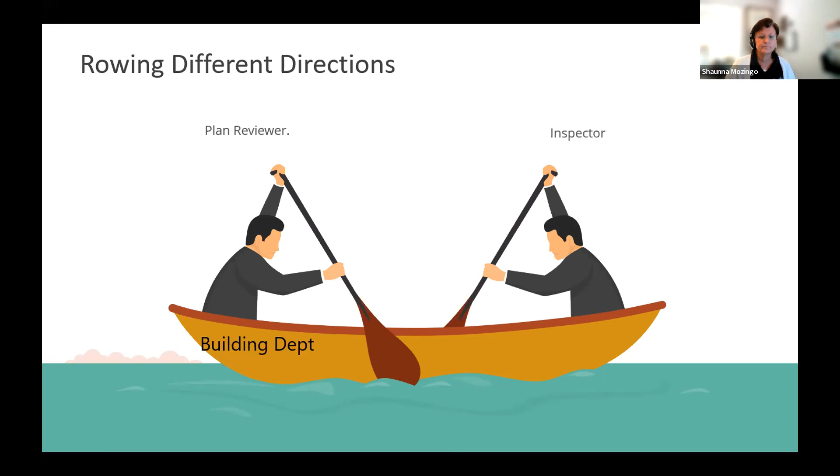So I would encourage you as we go through today, not only to think about your contractor and your designer, but to think about your inspector. What would help them on the set of plans? And how can you better that relationship so you're rowing in the same direction?

Another thing to think about is, what is the purpose of plan review? Well, sure, to make sure that the design meets all the applicable codes and that the building's safe and healthy and efficient.

But is there more to it than that? Or could there be more to it than that? Do you find yourself with designers that you absolutely love reviewing their plans because you can trust them, you know that they're competent and they're going to put all the stuff on the plans, you only are going to have one or two comments, and you probably can just identify those on the plans, stamp them and approve them and get them out the door.

But then you have those other guys, right? Their plans you have to really pick through with a fine-tooth comb because you have a history with them of trying to sneak things in or not doing their due diligence, not doing their work. I've had designers that after 10 to 20 comments, sorry, here's your plans back, start over. Sometimes they just want you to create their list because they don't really know the code, and they'll change just those items, right?

And so you have this history of different designers that you work with, and so it gets kind of frustrating. So we're going to see maybe later on how we could, by how we word our plan review comments, how we look at things, how we put things on the plans, take that knowledge transfer that we have and pass it on to the designers, pass it on to the contractors in the field if they open their plans.

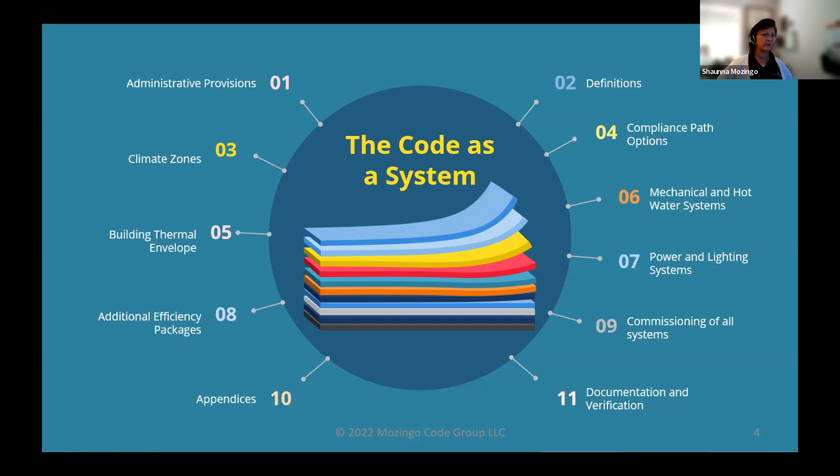Commissioning now in the 2021, commissioning doesn't just mean mechanical systems anymore, or just lighting controls. We have building envelope commissioning come into play. So commissioning takes on a new meaning. Then you have all your appendix chapters, and then of course documentation and verification. So it's a system, and we want to think of it that way. When we start doing our plan review and we start making comments on one, oh shoot, how did that affect this over here? I might have to make a comment over here. So just keep that in mind.

Another thing I want to just mention is in the energy code in chapter 1, it gives all these things. Okay, these are the things that have to be on the plan to be able to verify energy code compliance. And it gives you this nice little list, right? What compliance path, they have to tell you what path they chose now. Did they go prescriptive or performance or whatever? What R-values, solar heat gain, U-factor, everything about the mechanical design system, mechanical sizes, efficiencies, types. Residential, did they size it with Manual J? Commercial, did they do their equipment sizing?

That's something that, probably 1 out of 20 plans that I get for commercial buildings, they turn in their equipment sizing because nobody asked for it because they don't know how to review it. So it's probably one of my top 10 plan review comments. Please provide your load calculations, because they just don't do it on commercial very often. Nobody's asking for it. Equipment and system controls, do they have all of their sequence of operations, all their thermostats, all their controls, all of their demand control ventilation, lighting controls? Are all the controls listed on there?

Duct sealing, now it's required that on the plans they document their duct sealing and duct and pipe insulation and location. We're going to see when we get into some of the code requirements some new stuff. And so how do they do that? Do they just say, oh, we're going to seal our ducts? We're going to have all our ducts in conditioned space, so we're going to test them. How do they tell you on the plans what they're doing? A lot of times it's in a note or a comment, and it does require air sealing details. This is just residential, but I just want to give you an example of, it does require these air sealing details because we don't want them to get all the way to final where they fail a blower door. We want to give them a roadmap to 3 air changes per hour and help them succeed. And so they're supposed to put those details on the plans.

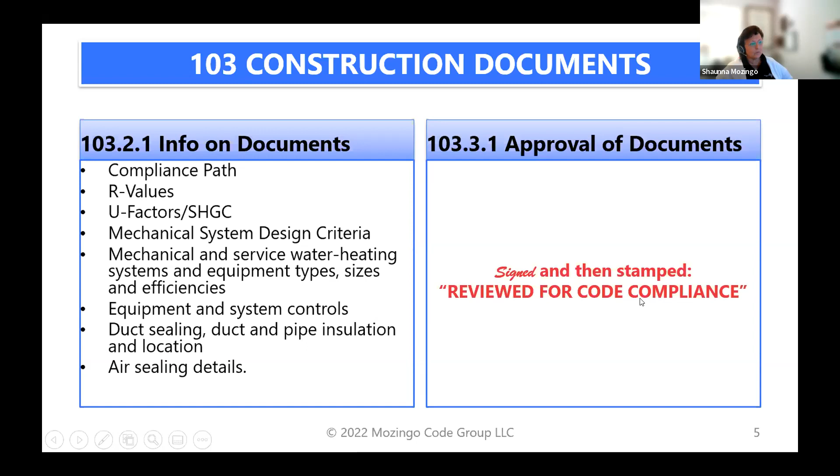But the other thing I want to point out is in chapter 1, if you don't amend chapter 1, section 103.3.1 tells you, once you've reviewed, you sign it and you send it out the door with a stamp. And the code is specific to say that the stamp says reviewed for code compliance. What does your stamp say? Approved, a date, a signature. If we're going to ask them to go by the letter of the code, maybe we better look at this section and make sure our stamp says what the code says, or amend the code to say what the stamp says. A lot of people don't pay attention to the things in chapter 1, so I want to bring that up.

Another thing to point out is in both residential and commercial, all the previous code editions had this section that said it's mandatory, meaning I can't trade it off no matter which path I choose, or it was prescriptive. They took that away. They said it was too confusing. So just want to remind you that just because the word went away doesn't mean that the requirement went away. When it said mandatory, it just meant these are all the things that apply to you that you can't trade off if you choose a performance path, right? So instead, they just took the word away. The requirement is still there. You have to do it. If you go performance, they just made it a table in that performance path saying, hey, here's the things you can't trade off.

Because that's when it applied anyway. So just to take the confusion away, they took it out of the main body of the code and just put it over. If you go into the performance, ERI path or performance paths, that's where you're going to find these tables. So none of that changed. It's all still required. It still can't be traded off. It's just listed in a different place. So remember that when you are going through and doing your plan review.

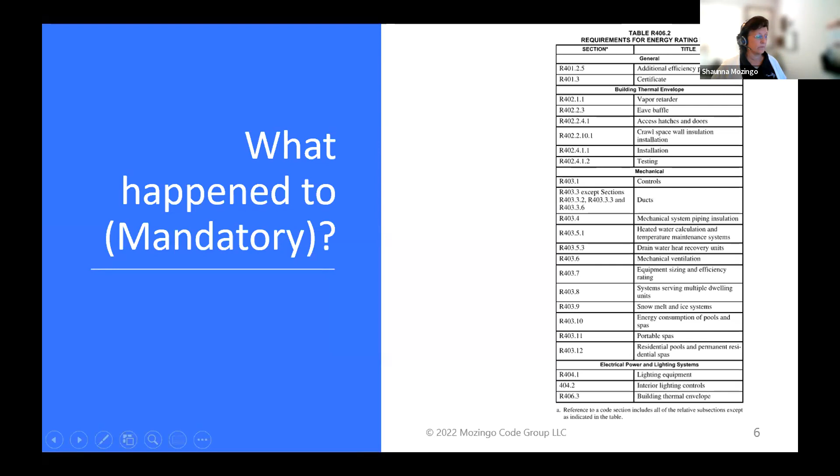Another thing, even though it doesn't necessarily say it in that list of things that you have to comply with, it is very important that you call out the thermal envelope. They have to depict the thermal envelope on their plan. What do they consider to be in conditioned space and not? A lot of times I see it like this, a section of a building. Okay, well, so their attic is outside the envelope. Then I know my insulation and air barrier need to be right here. If the attic was inside, then here I need to make sure I have my insulation and air barrier here.

You know, is the crawl space inside or outside? If I know what they're doing, I know where to look for things. And so it is now a requirement in the code that they depict that thermal envelope on there. I still get plans with it not on there, so I know people aren't calling it. But really, if we just get them in the habit of doing it, not just the habit of putting something on the plan. It's the education that goes with putting something on the plan.

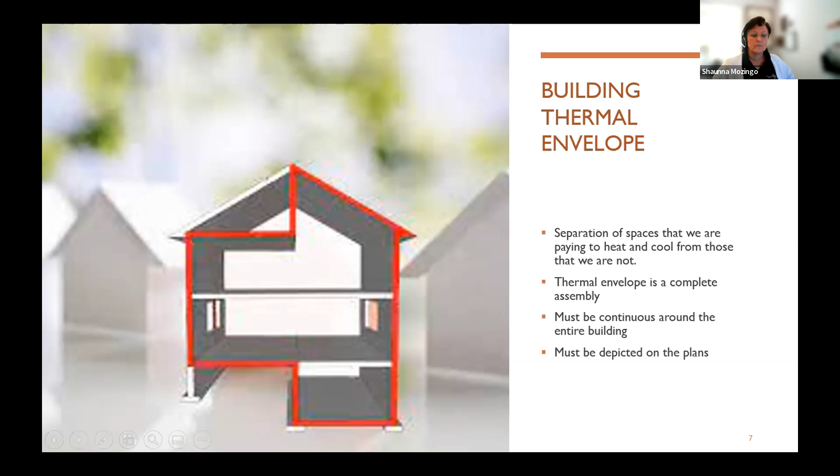If I make you depict your thermal envelope, I have just made you think about what is your thermal envelope. And so now I have a better chance of you putting the insulation and caulking the insulation and the air barriers in all the right places, because you had to put some thought into where is that. So there's reasons for it, right? We don't just put things in the code because we want them.

All right. Let's get into a few things that we should be aware of for residential plans. First, besides determining that the building's actually residential and knowing your climate zone. So hopefully you know the difference between a residential and commercial building for the energy code. Just highlighting that, residential is anything built out of the IRC plus those multifamily R2s, R3s, and R4s, so not always multifamily, but apartment buildings built out of the IBC, not commercial. They are residential for the energy code if they're 3 stories or less, so we just make sure we know that. I will tell you that some people are changing multifamily to all be commercial.

I tried to make that change this cycle in the energy code for ICC to just say, all multifamily will be looked at under the commercial code so that we didn't have this 3 stories or less, 4 stories or more. I wasn't even allowed to submit the proposal. ICC kicked it back to me saying, absolutely not, we're not doing that anymore. People have tried it in the past, we're not doing it anymore. We are sticking by the scope that is in the code, and you're not allowed to ask us to change that. So for those jurisdictions that have done it, you know, we had hoped that we could just do it nationally, but it's not allowed.

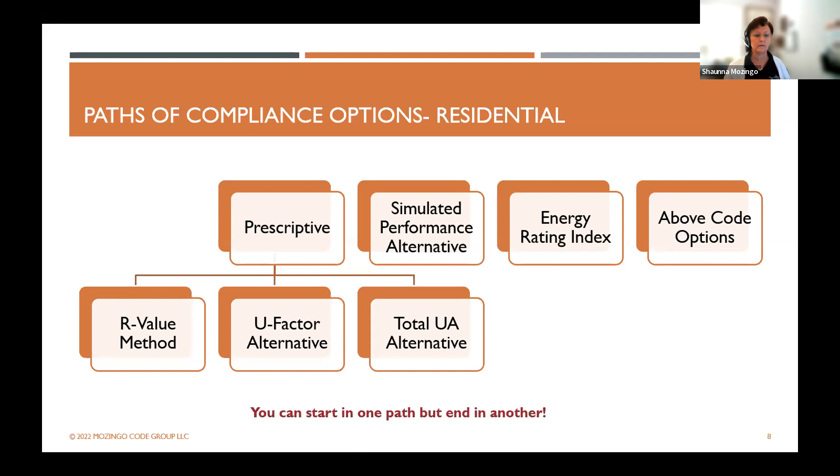If you get to performance and you can't make it work, then you're probably going to have to go back and change something under your construction. But at least go through all the paths to see if you can make it work. You know, it will have to get re-reviewed, but at least you're not tearing apart your building. So there are some things with that to think about. Same with commercial. All right, so some things just about the table real quick.

The table is changed, and so make sure on residential that you're looking at the different things and that you're downloading your errata. Go to iccsafe.org Errata Central. If you just do a Google search for Errata Central, it'll pop up. So Errata Central, download the errata. There's a lot, especially for that 2021.

The things that we're going to talk about today will apply to any code edition, but we're going to specifically talk about 2021 as I go through these slides, because you'll see, here's your prescriptive table. If I go prescriptive, I have to do these things. Yes, there are some changes in there. We're not going to talk about all of those changes; that was in a different class. We're going to talk about how to find them on the plans and what we need to know.

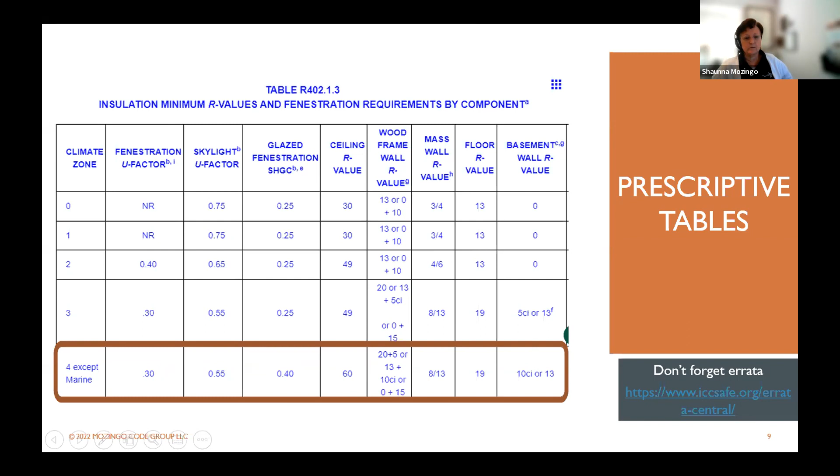The biggest thing that I feel you need to know is there are some errata, especially for commercial buildings. How did I end up with that table right there? And for the R-values. So if you look at this, here's our climate zone. Say we're in Denver and we're in climate zone 5. Here's the table right here. This is the new 2021 table. There's a lot of errata.

So make sure that you're downloading it, because they really had the intent of offering, if you're a 2x6 wall, an R20 plus 5 prescriptively. If you're a 2x4, you still have the opportunity to use 13 plus 10. But they also wanted a cavity-only option. So if you just want to do cavity and not cavity plus continuous, you could do an R30. Might have to change some of your framing, but you have that option. Or if you wanted to do continuous only, you have that option.

Sometimes in the first printing of the book, that didn't show up. So make sure that you're downloading the errata to get really what you should be doing in those jurisdictions. Look at your footnotes, read those footnotes, because those footnotes have some new things. If I'm a plan reviewer and I go back to this table and it tells me that I need a 0.30 window, did you read the footnote?

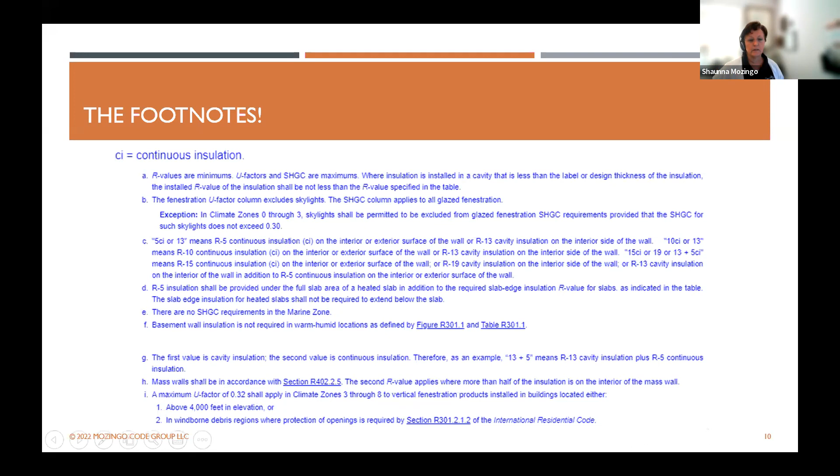Because over here in the footnote, it says it could be 0.32 in climate zones 3 through 8 if you're above 4,000 feet in elevation. Name a place in Colorado. Maybe there's two that aren't above 4,000 feet. So now really they're allowed to get 0.32. It's because of the way the window's made, especially if they have that argon gas; once you get over elevation, that gas isn't as good, and so the U-factor changes over certain elevations. So just some things that I'm noticing people are not looking at when they're reviewing their plans.

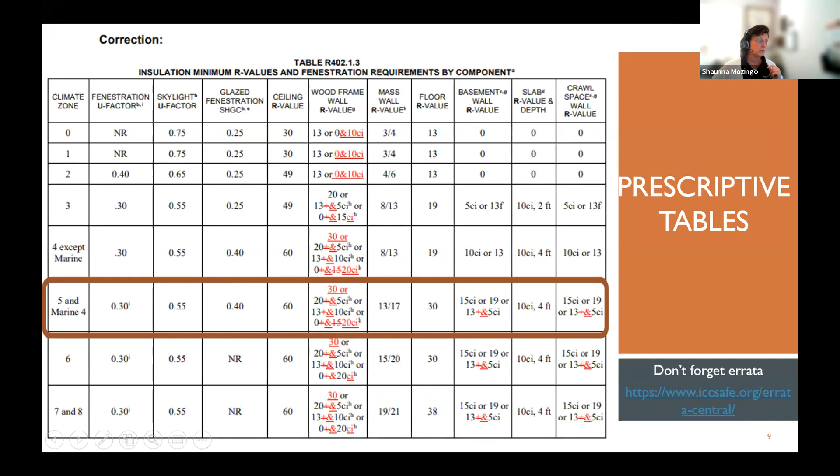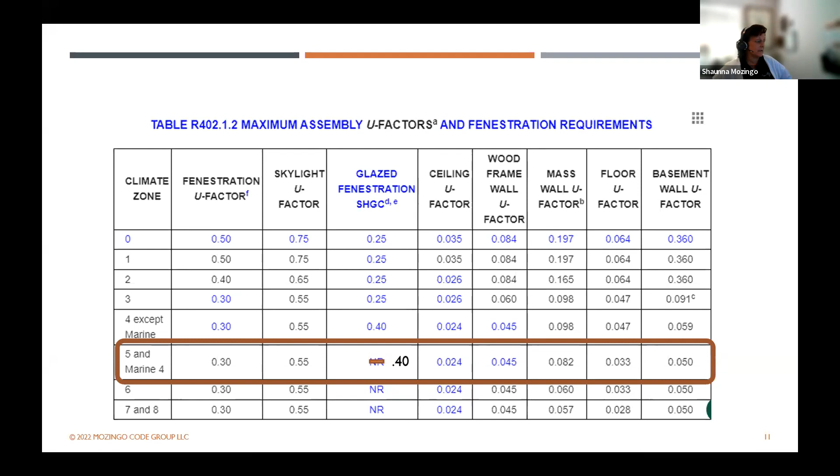That makes a big difference in equipment sizing: how much heat makes it through the window or doesn't. You know, if I have a lot of heat coming through the window in the summertime, I need maybe more air conditioning power to offset that heat. So it does make a difference in equipment sizing.

So pay attention to that. When you're using the total UA, that's your REScheck path. That's a total UA. This is like saying I have two buildings side by side. I'm gonna look at them side by side. One is if I did it right out of that table, but this is what I want to do.

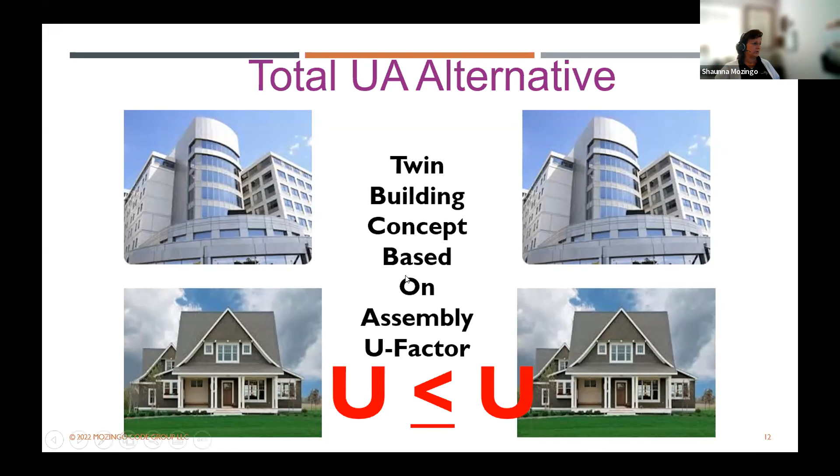And it's just comparing anything that can be converted to a U-factor. So your framing materials, your insulations, your windows, those kinds of things, anything that can be converted to a U-factor, it's comparing them side by side, and you can make trades. Instead of R-60 in my attic, I can put the R-49, as long as somewhere else I do better in a U-factor, so that I can equal out.

Most commonly people use REScheck to do it. You could turn in your manual calculations. I don't see anybody do it because this is a free software. So a couple things to note that I see people missing on the plans when they're doing REScheck. First of all, REScheck is supposed to be a mirror of the plan. If the plans say they're doing cavity-only insulation, the REScheck shouldn't show a cavity plus a continuous, right?

A lot of times they'll say, oh, well, there's an R-2 value in the framing or the air film in the drywall. No, REScheck already knows there's going to be framing, and it assumes drywall. It assumes best practices for that wall. It knows there's R-value or U-factor in that, and it is calculating that behind the scenes. The only thing you get to do is put the actual R-value of insulation.

Now, if you're doing like an insulated siding, or some kind of insulation on the outside or the inside of the building, you can put that there. But most of the time when I see R-2, I'm like, wait a minute. What insulation are you using continuously to get an R-2? And it's usually them telling me they're counting the drywall. The system already does that. So that's one thing that I see.

I see a lot of times people put the wrong climate zone, which affects what is required. So if I put in climate zone 2, I don't need as much insulation, and that's what it's going to compare me to. So I want to make sure that I put the right climate zone in there, and that I put new construction and not alteration. That makes more of a difference on commercial than it does residential. But just making sure that the inputs are correct here, and that it passes, that you got the green line.

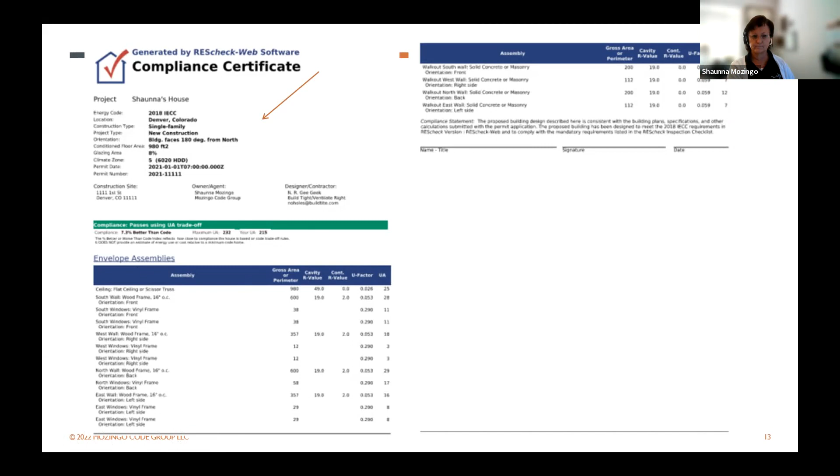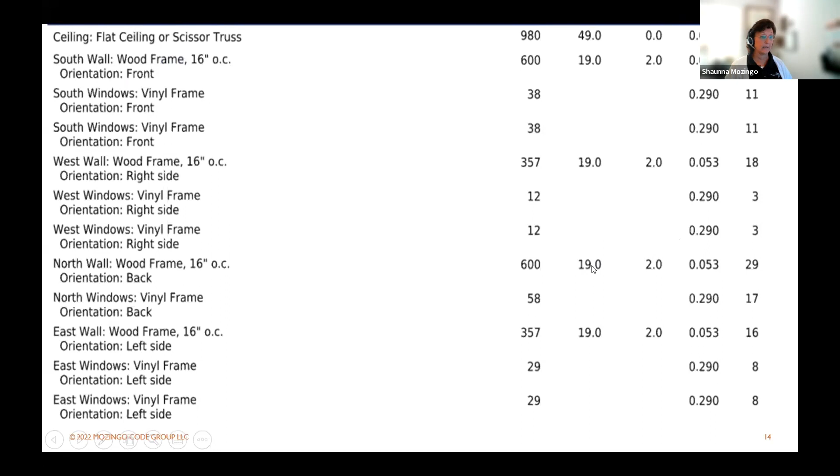This is just a tool. This isn't a technical, scientific document. This is a tool to say, the plan said all of this. Yes, it passes. No, it doesn't. So it's supposed to be a mirror image of that. Really going through, is this the U-factor they said on the plans? Is this the R-49? Are they showing R-19 cavity plus continuous? Just really going through there and noting that.

Performance gets a little more complicated sometimes. It's really that same twin house concept. It's just not only U-factor. It's looking at the whole building. How does energy move? How does air move in the building? How does air move in your ducts? It just looks at all kinds of different things in there.

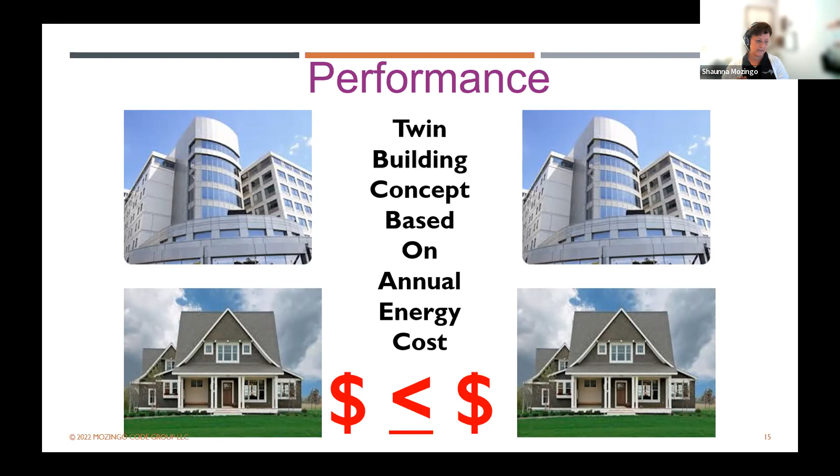And instead of complying based on U-factor, it's complying based on cost. If I built this house, it's going to cost me $100 a year for energy, but the way I want to build it has to equal the same or less in energy cost per year. So you're looking at a report, usually done by an energy rater because it requires certified users for the software.

There's a lot of software. The two most common, Ekotrope and REM/Rate. EnergyGauge is used in Florida. Wrightsoft is coming out. I hardly see it used, mostly for equipment sizing, but why not come out with an envelope compliance software, because you are having to enter everything about the envelope to figure out what size equipment you need. So they came out with that. Reading the reports, the things that I see the most.

When you're reading these reports, again, a mirrored image of the plans, whatever they say they're putting in the building, that's what you should see. 2x6s, 16 inches on center or 24 inches on center really makes a difference in U factor. Less wood, better U factor, right? So if they're doing 24 inches on center or 16, or if they're doing 16 but calling it 24 on one of these documents to get a better credit, things to know, right?

What insulations, what windows, but this also has a cost shown on it. This is an older report, but the idea is the same. It tells you if I built this house to code, here's how much it would cost. Here's how I designed it. This cost needs to be less than this cost, equal to or less. I have seen them come in with a much higher cost. And down here, it'll say it does not meet.

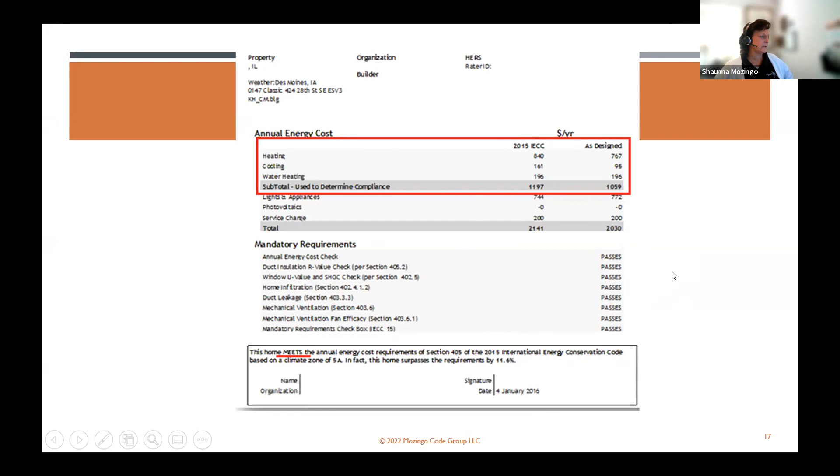So are you reading it, right? The cost is less and it says that it meets the code, and it meets the code for the edition that you're on, not an older edition, right? So those are the main things that I see plan reviewers messing up. It will also tell you the mandatory requirements that are in the code and whether they've looked at them. It's really a check button that they click in the software, so I usually still look at the plans to make sure I see all of those things on the plans. So some things to look at on a plan review report.

Now, the software will also do a REScheck or a UA calculation. So you can see that it passed. This is the same house. It passed for cost. But when we look at their overall UA, it has a higher UA than if they built it to code. So it totally does not pass UA. That's good to know. Some houses will pass both ways, but it's good to know that, all right, they didn't pass UA, they only passed performance.

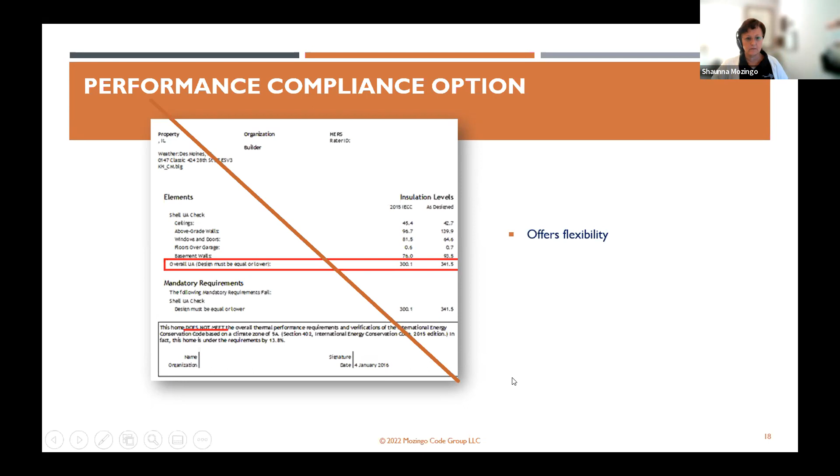So if anything changes in the field, I really need to be paying attention to this because there's not another path that passed, right? If they pass performance and they don't do everything towards performance, then we need to pay more attention. If it passed UA and they didn't do everything, I still have the performance path to go to. So these are some things to keep in mind. All right, I better get moving here.

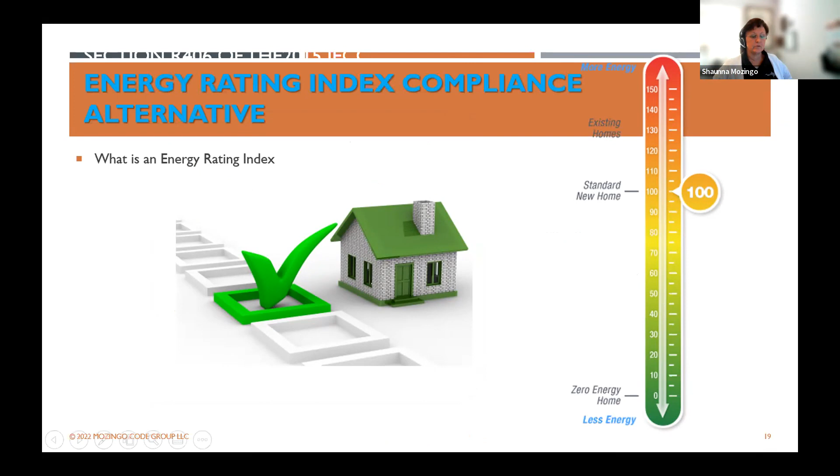ERI path, that is your energy rating index path, that's using a score. So some things to keep in mind, those reports, it's the same people, it's the same things that I see. You're allowed to trade off more. So there are some things, if you put solar on, there are limits to what you can trade. So you really want to pay attention to that. You're not allowed to just trade whatever you want and throw solar on to lower that score. There are some backstops in there.

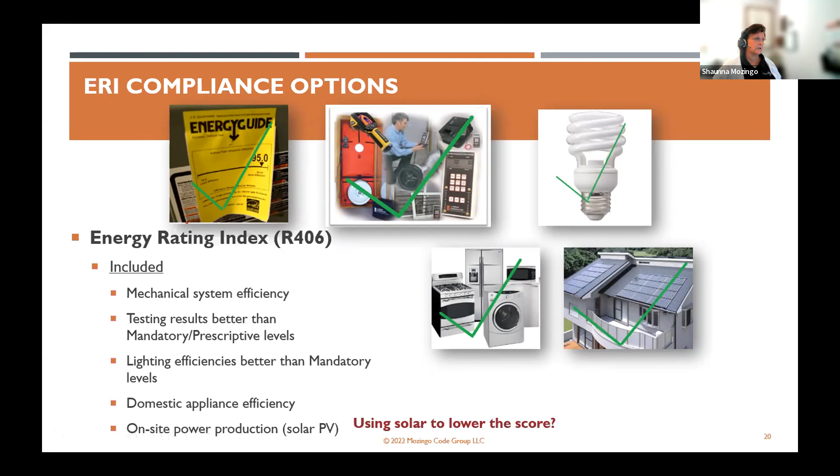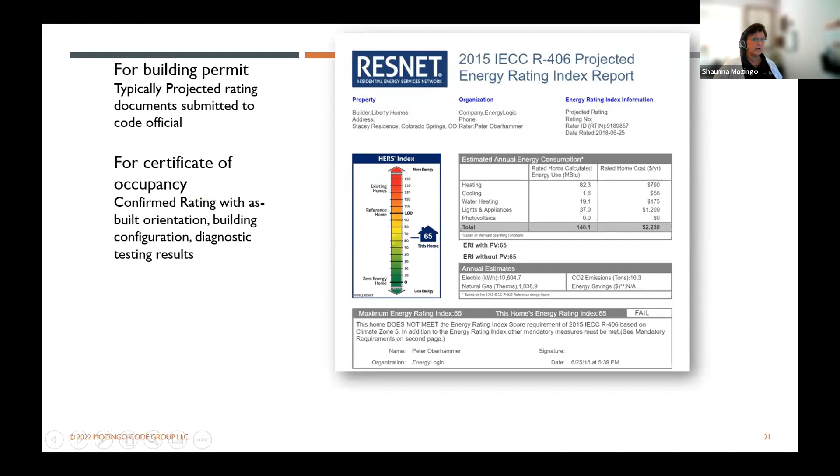When I see the reports, I'm really looking to see, did it meet? No, does not meet. Why doesn't it meet? Oh, it's got a score. It says it failed. It has a score of 65. Oh, what is the score that's required? Oh, well, if I'm in climate zone 5, it needs a 55 to pass. Sorry, go back, right? I can tell you, I see a lot of plans coming in that have failing documents because nobody's reviewing them, they're just accepting them.

So I'm just trying to give you a couple little things to look at. Even if you don't do a full-fledged go through it, make sure everything lines up, at least look to see if it passed or failed, right?

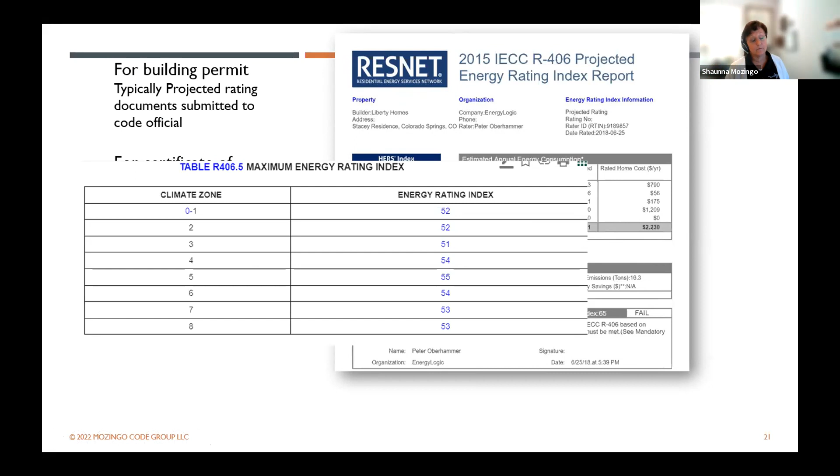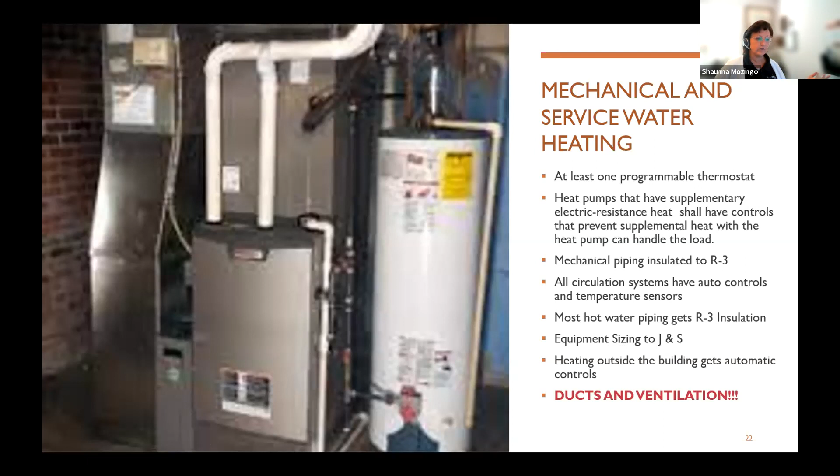Mechanical, there's some things in mechanical. Do they have their thermostat? Did they insulate their piping? A lot of that didn't change residentially. Did they size it? Do they have their controls outside so the boiler's not running all the time if it's warm enough outside to melt the snow, if they have a snow melt system? But there are some new requirements for ducts. And so I want to run you through that real quick. And how do you call that out on the plan?

It's revised to really clearly define ducts inside the envelope versus outside conditioned space, tells them how to insulate the ducts outside the envelope, or even ducts buried beneath the building or underground. All of that got defined in here, and when you can use TDE, thermal distribution efficiency, as an equivalent to an R value.

So all of that is a little bit more defined in there, but there's also a change to ducts within the thermal envelope. It's really specific now about how to deal with ductwork in a floor or a wall, an exterior wall, and when they are considered in the envelope or not. So really just pay attention to that duct system and to those code sections on the duct system.

But what I really want to point out is the biggest of these changes is the requirement that is added by actually removing an exception to now mandate that all ducts get tested, whether they're in the envelope or outside the envelope, right? It used to give you this whole duct system requirements for testing, and then it said, except ducts within the envelope. That exception went away, right?

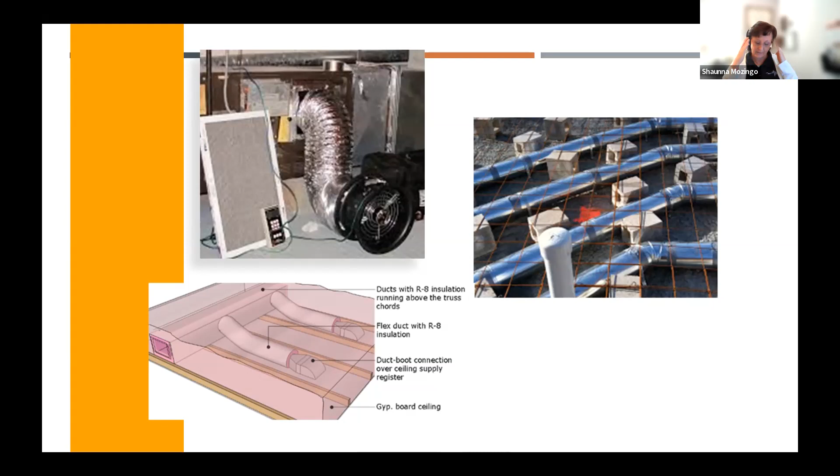It's how do you read the code book? We're going to go over this in a couple of sections. How do you read it? The exception is removed, so now all ducts get tested. All it says, though, is that if it's within the envelope, you can have a higher leakage rate than if it's outside the envelope. And if you go performance, you could trade off the leakage rate. But if it's prescriptive, you do this.

So there are things about how you read the code. That's why I'm saying this code is a system. How you look at what path they chose or where the ducts are, how things are in the envelope affects mechanical. So really keep that whole system mindset going when you're going through this code.

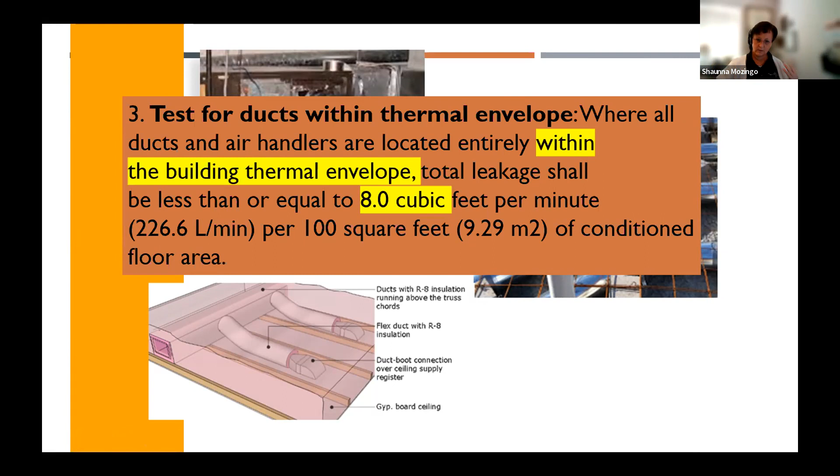So making sure that, okay, the ducts are in the envelope and you chose performance. All right, your ducts can leak this much, but you can trade it off. Oh, you went prescriptive or REScheck. Okay, your ducts are in the envelope, they can leak this. The ducts outside the envelope can only leak this, and you can't trade it off, right? And so there's just knowing how to use the code and knowing how to read it.

Lighting has changed a little. Lighting is something we don't spend a lot of time putting on the plans. Like, oh, you got 100% high efficacy lights. All right, great. Maybe they never even mention what kind of light bulbs they put in on a residential plan. So you make a plan review comment, required to have 100% high efficacy lights, right? It used to be 90, it was 75, it was 50. It just keeps going up, 100%.

Now, there are some new requirements in there, though. New lighting controls are brought in that require either dimmers or occupancy sensors or other controls built into the fixture to be installed. It does provide some exceptions for bathrooms and hallways and that sort of thing. So make sure that not only did they put in the right light bulbs, do they have the right light switches, right? It's not enough to have a high efficient light bulb. You have to turn it off when you're not using it.

And so how do you write that on the plan? Do you turn down the plans because they don't have the right lighting controls? Can you make it as a comment? If you make it as a comment, is there a way to word it that they're going to remember it and put it on future ones? Sometimes I will reject a set of plans and tell them, hey, you have these requirements, even though I probably could have, depends. It goes back to, what kind of designer am I dealing with?

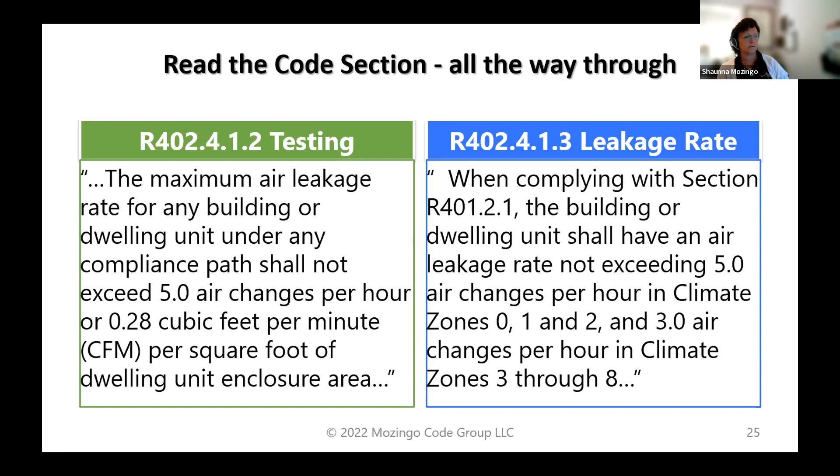So what happens when they're writing these codes, a bunch of different code proposals get combined to make it in the code. ICC does their best to put them in an order, but they put that performance requirement first, and people read that and say, oh, it's 5 air changes per hour. They never continue on to see that this other section is in there. So be aware of that.

There are some additional efficiency package options that got into 2021. We need to make sure those are on the plans, because in order to make that 10% jump they said we made, it included picking one of these options. In 401, it tells you to pick a path. In the path, it tells you when you have to comply with 408, if you're prescriptive or performance, unless you do some other things. So then you figure out which option they chose.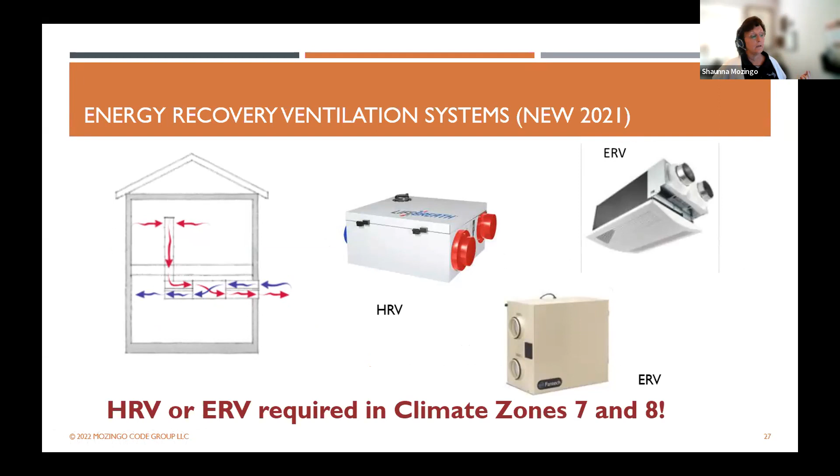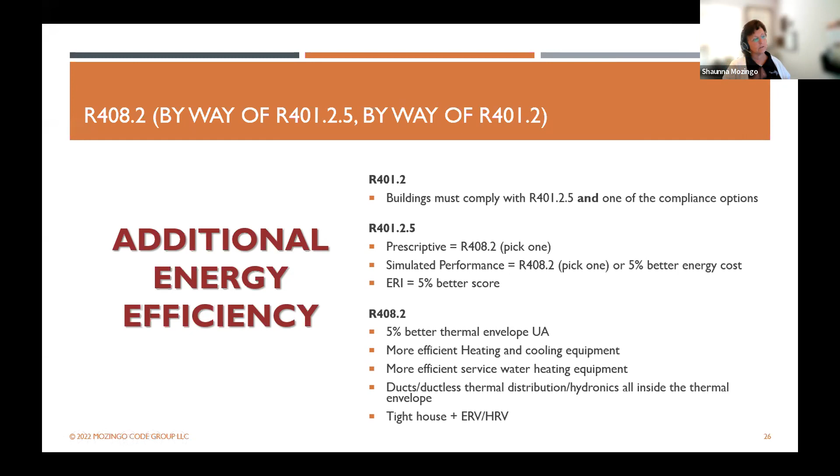The one thing I want to show you is in climate zones 7 and 8, there's a new requirement in 2021 that they have to put in an HRV or an ERV for their ventilation. If they're required to already have a tight house and an ERV or HRV, maybe they shouldn't get credit for that as an additional option. That's not an additional option; they were required to do it. So there are some things you really need to be aware of as you're going through this code.

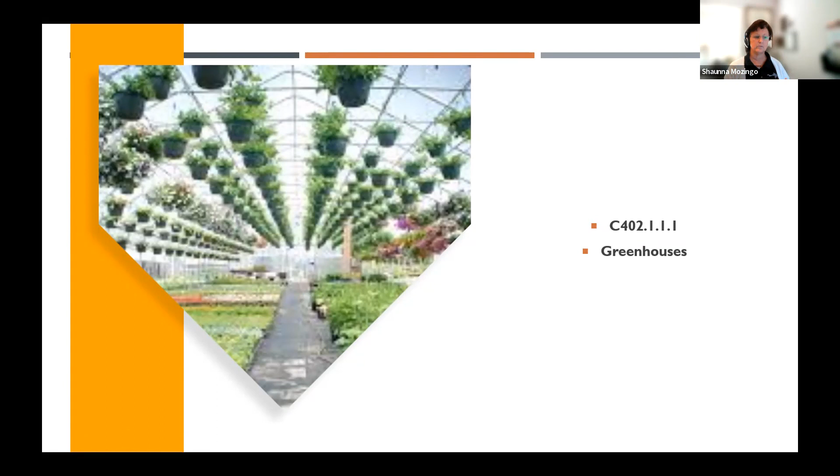I'm going to zoom through. We talked about greenhouses. As we're in commercial now, greenhouses are defined, but they also redid it. I just want to plant in your head: we used to say greenhouses are exempt, grow facilities are exempt. They're not anymore. They're not exempt from envelope, and they're not exempt from lighting. So pay attention to that section. They've got a whole section on conditioned and unconditioned greenhouses; it's a little confusing, but they're trying to separate low energy uses from higher energy uses.

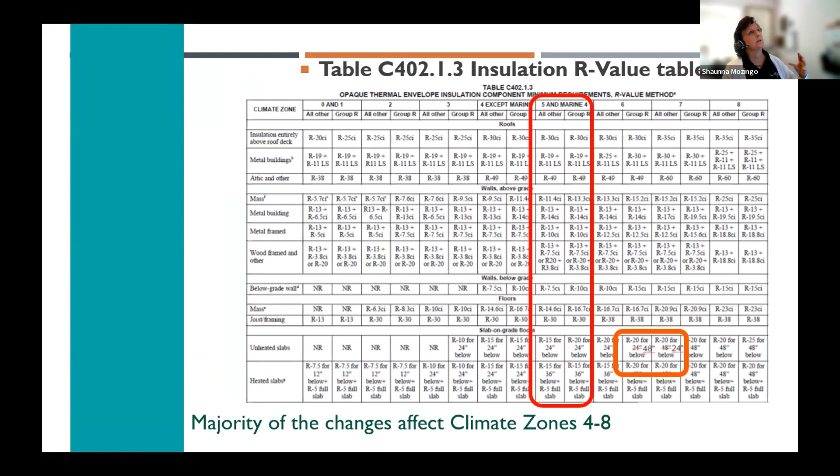The table changed. This pink shows all the places the table changed for commercial buildings. Make sure you're in the right category, but pay attention to your errata, because your designer might not download the errata. They might turn in slab insulation of R-20 for 24 inches thinking they're following the code, without the errata that says in those climate zones it has to be 48 inches. And so you have to reject the plan. Make sure you have the most up-to-date version so you're putting in the right thing.

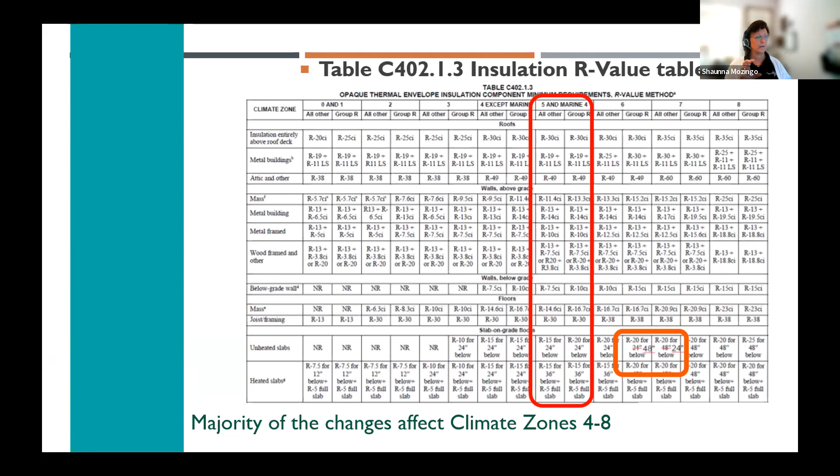COMcheck is still allowed, for the envelope, and it has mechanical and lighting as well. The biggest thing I find on COMcheck is people not checking for the word "other." If you see the word "other" in any of those descriptions on the report, that means they chose something that wasn't normally in COMcheck and had to manually enter the value, whether it was an equipment efficiency value, a lighting value, or an envelope R-value or U-factor.

They manually put it in there because it wasn't in the drop-down list. So whenever they choose other, it pops up and they get this notification that says, hey, you're going to have to turn in documentation to verify what you just entered. So they know they have to, but they know also who's requiring it and who's not. So whenever you see the word other, just know that means they manually put something in there, and you should

double check it. Some other things, projections: a lot of times they're putting in projections when they don't really have one. And if they have a projection, it allows them to get away with a higher U-factor or a higher SHGC, a worse SHGC on their windows, the bigger the projection. So I check for that, make sure that they're not putting projections if they don't have one. But this is nice just to show you the help menu on COMcheck. It really walks you through how to measure things, what to look for, how they looked at it for compliance. So be familiar with that in there.

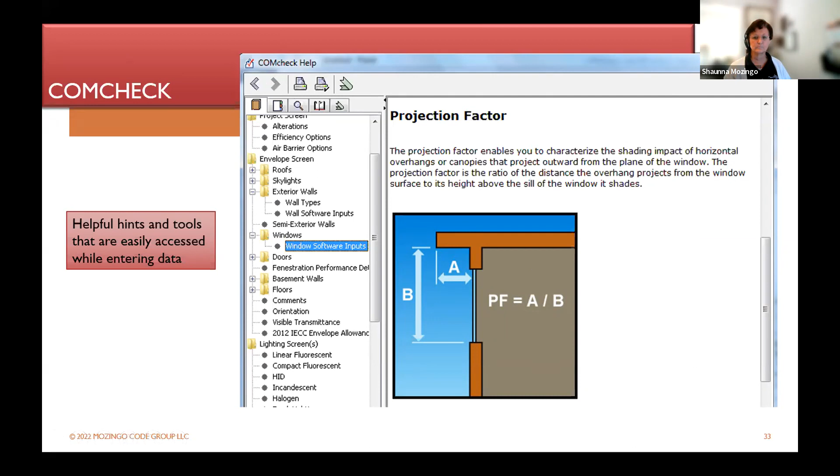Performance, commercial performance, the reports are different. People get confused. They make them more complicated than they have to be. So I really just want to say, when you're looking at a performance, if somebody goes performance on commercial, don't be freaked out, right? It's like taking a test. When I take a test, I know the code by heart. When I go to take the test, I might get a 70 or a 75 because I freak out when I'm taking a test, right? The same is with these reports. Oh my gosh, it looks so confusing. Where do I start? Start as if you were reviewing a set of plans, if you were reviewing a COMcheck or a REScheck.

Do the things they say in all of these 50 pages match what they're doing on the plan? Are the ducts where they say they are? Are the sizes of the rooms the way they say they are? Are they in the right climate zone? If they say they have 50 pieces of equipment, do they have 50 pieces of equipment, right? If they're saying they're using 2x4s or 2x6s or metal construction, is that what the plans say? Just make sure you're comparing apples to apples and that it's the same cost. Is it going to use less energy at the end of the time than it did before, right? So just don't freak out about it.

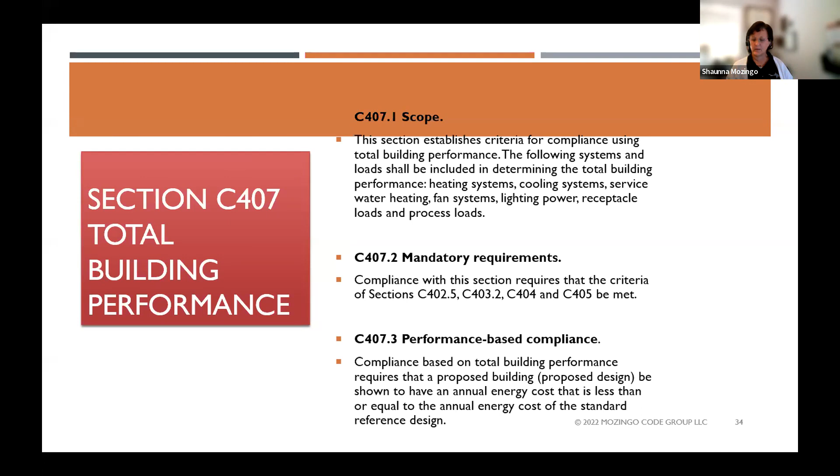If you get these and you don't know how to review it, email me. We'll review it together. Or put in a question into the toolkit, not technical assistance, but the code question part, where you can type in a code question. Can somebody help me go through this? One of us will respond to you and we'll go through that with you, right? So don't freak out about it. Just compare it. Are they comparing apples to apples?

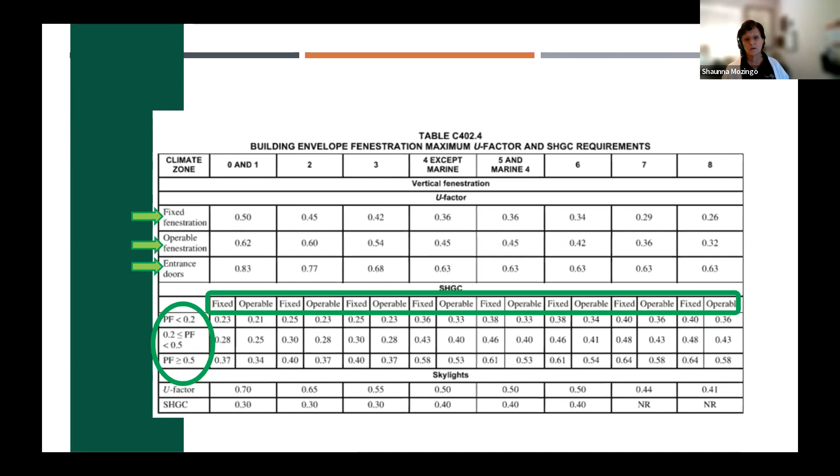Make sure that if they're calling out a projection, PF, projection factor, that they get a different SHGC for the projection. So you could see, like in climate zone 5, I can go from a 0.33 all the way up to a 0.53. That's huge. That's going to really affect their mechanical equipment sizing if you let them have a 0.53 and they didn't have a projection. So really, really look at that. Make sure you're in the right climate zone and looking at everything for that climate

zone. And then a couple things to really point out that have changed for commercial buildings that you're going to need to pay attention to as a plan reviewer. You think of this as an inspection issue. Somebody's got to verify blower doors on commercial buildings and air barriers on commercial buildings. It starts with you. It starts with a designer. They might not get it right, but it starts with you.

Make sure that it's identified on the plan so you don't get to some other phase of construction only for them to fail, right? We want to build that roadmap to passing. So there's requirements for continuous air barriers. That's always been in there.

But now, you have to test if you're a dwelling unit, a commercial dwelling unit, maybe it's a hotel. There's certain things, if you're dwelling units that are dwelling and sleeping units, that you have to test the building. And then even for those buildings that don't have dwelling units or sleeping units, depending on the size of the building and the climate zone, there are blower door test requirements. So we want to know that, right? We want to know if they're required to test.

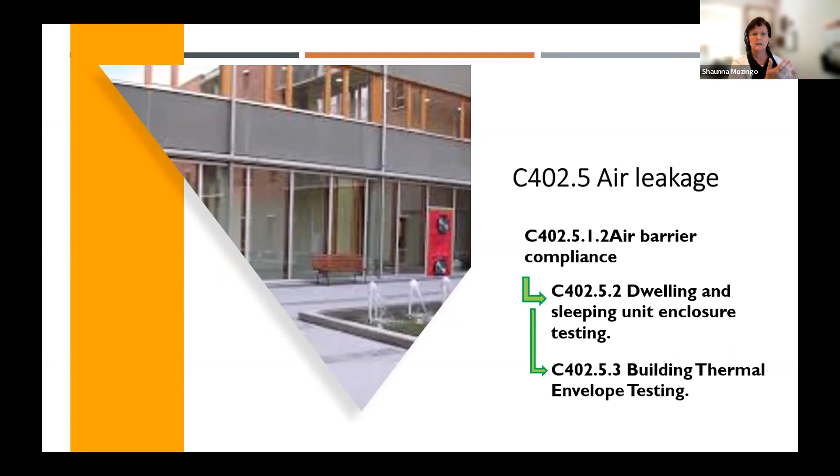Maybe the first couple times we're going to turn down a set of plans and say, hey, identify how you're going to have to test this building. Where are those details for that tight envelope, right? And then there's also this requirement that the air barrier has to be commissioned now. Somebody has to verify as they're putting up that air barrier that it is continuous and it's installed correctly. It could be the code official, it could be the designer, it could be a third party, but somebody has to verify that air barrier commissioning, right, of the thermal envelope.

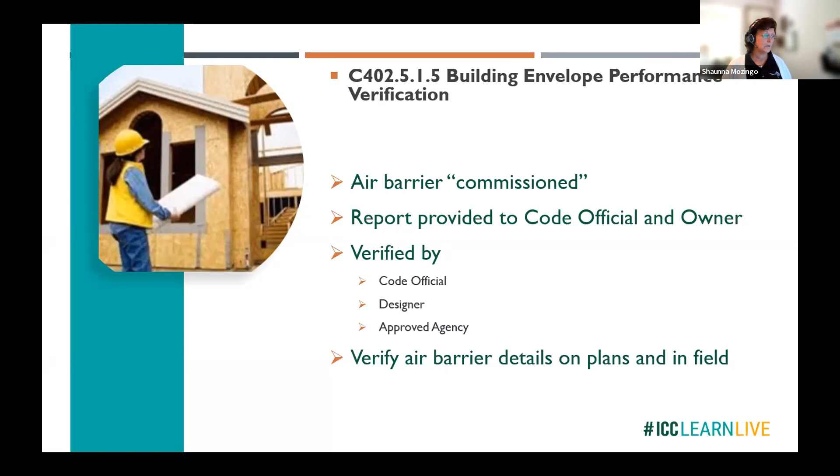Those are new requirements that they're not used to. We're going to need to be their first line of defense on this. We need to be identifying that on the plan. Maybe it's turning it down a time or two until they start identifying it on the plan. Sometimes if they don't know the requirement is there, you get out in the field, they're not opening those plans. Is it their fault? Yes. Are we wanting to get to the end and have them fail? No. Is there things we can do? Yeah, we could fail it at plan review once or twice, just some things to think about.

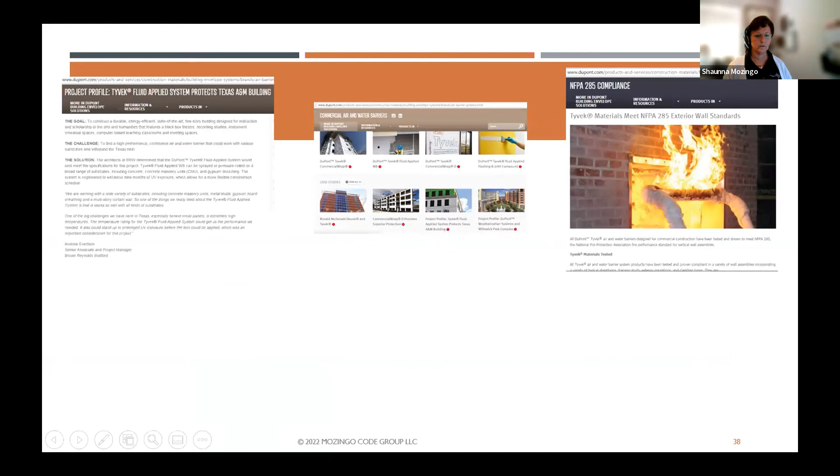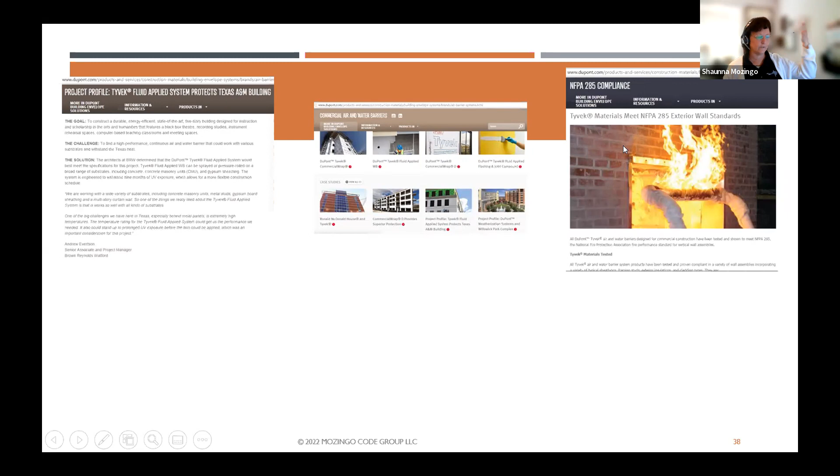Use your resources. Every insulation manufacturer, every air barrier manufacturer has a website that shows all the tools, all their lessons learned, how their product is applied, the challenges they face, the solutions they found. Do they comply with NFPA 285 for that continuous foam insulation outside of a building? Utilize the resources. Yes, it's up to the applicant to give you that information. I still look them all up.

I look them up because you might say, oh, we're just using Tyvek. Well, I know after being an inspector for a long time, Tyvek is very specific on the kind of staple or the kind of nail that you can use. And so I'm putting that on the plan, right? I'm going to set my inspector up for success. When he turns them down, I can go back and say, hey, this was on here. And so I try to do my research. Pretty soon I don't have to because it's in my head.

If they tell me they're doing this air barrier, the Air Barrier Association of America has every air barrier manufacturer on it. And when you look at it, I just chose the top one. Here's all the details. Here's their install instructions. So I'm doing that research. I only have to do it once or twice and it'll be in my head. But as I'm going through a set of plans, I'm like, oh yeah, you were trying to identify your continuous air barrier around the building, but I know by this manufacturer that you can't do this here, right? It just makes you a better plan reviewer to do a little bit of research when you can.

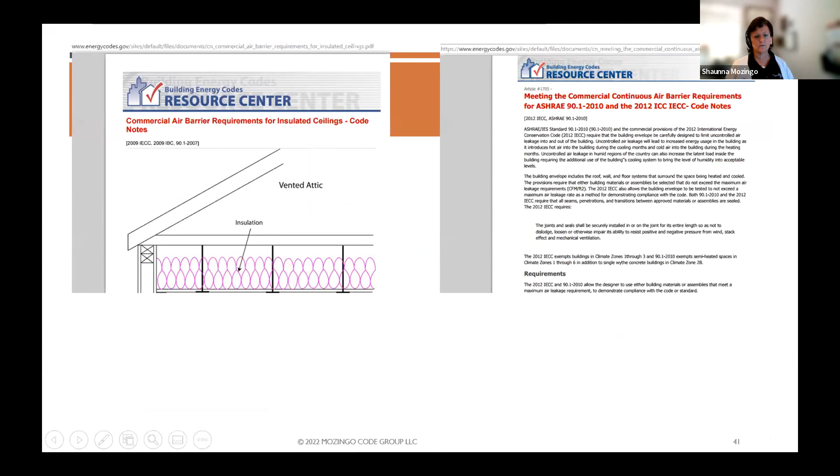Know your resources. Energycodes.gov, DOE has some great things in there about complying with the codes and how to meet different insulation requirements and how to do different things. So just doing some research is great.

A lot of people are doing restaurants, so I just want to point this out real quick. A lot of people doing restaurants with these big opening doors. There's a new requirement in 2021 to really be aware of about those operable opening interlocks. So this is saying when this big door is open, their mechanical system can't just be running. I'm not going to try to cool the building to 70 degrees when I have this big, huge opening to the outside. I need to interlock them.

So as a plan reviewer, I'm like, oh, I see this big door. This code is a system. Now I got to go to the mechanical section. Do they have the controls to shut the system back so it's not heating or cooling to their normal temperatures, right?

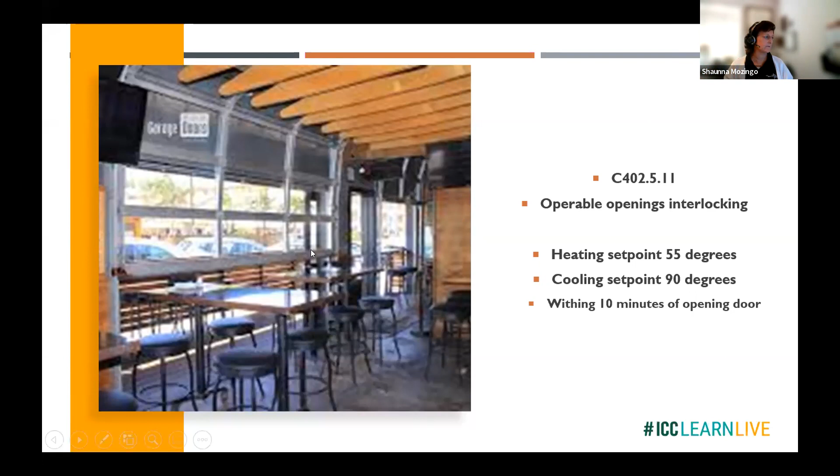So this just goes back to that code as a system type thinking. If you really look through it, it's going to have different requirements. So just keep those kind of things in mind.

Same with mechanical ventilation controls. Used to be that only certain sizes of places had to have demand control ventilation. You size according to the mechanical code, but you bring in controls to shut things down when there's not that many people in the room. Why ventilate for 100 people when there's 2 in the room, right? Especially now with COVID and we don't have as many people in the room.

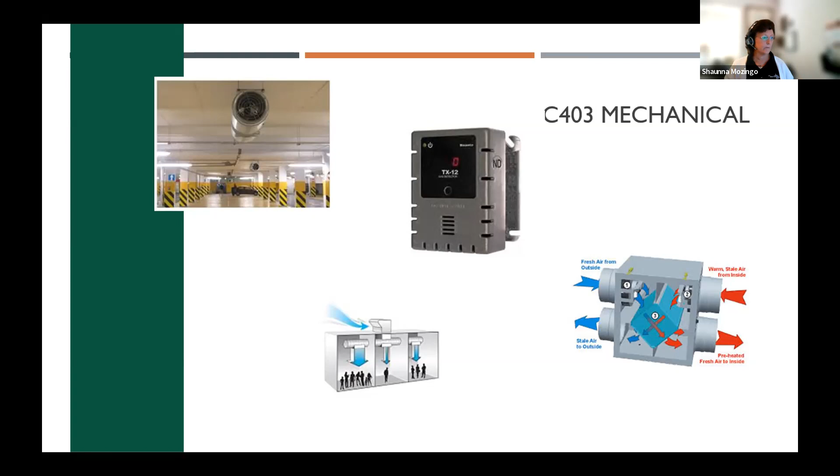So they expanded it. Make sure you read that section because it's been expanded a lot to apply to all single zone systems that require economizers; they have to have this demand control ventilation. There are exceptions, but pay attention to it. Parking garages have new ventilation requirements. There's new requirements for energy recovery. So just read the code book.

Lighting and power, I just want to talk about this real fast. I know we're running out of time, or we're out of time. Don't leave it to the electrical inspector. They're licensed to NEC. A lot of them are not looking at the energy code.

We want to give chance for success for the building and for the building owner who's going to have to pay that bill. So at a minimum, we're going to put on there where those things are required or call out, hey, this isn't required, or you don't have your occupancy sensors correct for your storage space or your office space or whatever. There's a lot of different requirements now. So, you don't have those right. Here's what you need to do.

Because the electrical inspector is looking, yes, it's all installed. It's at the right height. It's installed correctly. It's on the right circuit. But they're not looking at, is there an occupancy sensor required in this room? Or is there a daylighting thing in this room, right? So we need to call those out on the plans and make sure that they get them right.

Make sure that the designer is doing the work, right? You show me where you need daylighting controls. You show me your window to wall calculation. You show me the calculations and I will make sure they're right. If you turn this back enough times, they're going to get it right. If you don't turn it back, you're going to constantly be doing the calculations yourself. Make sure that you're sending it back.

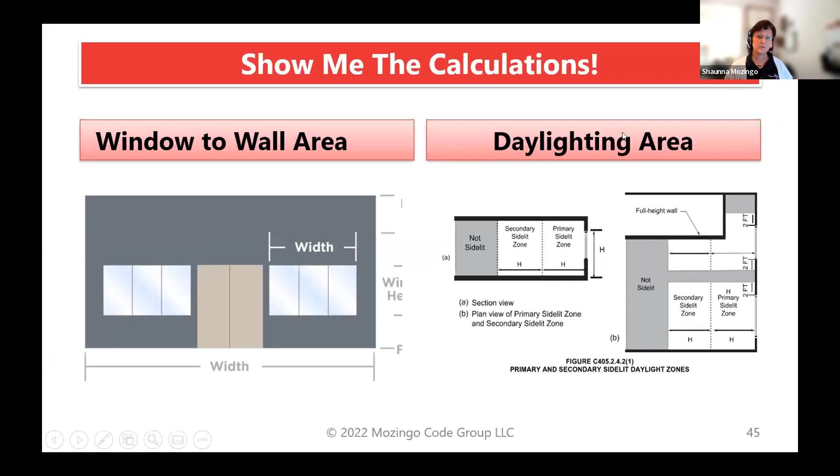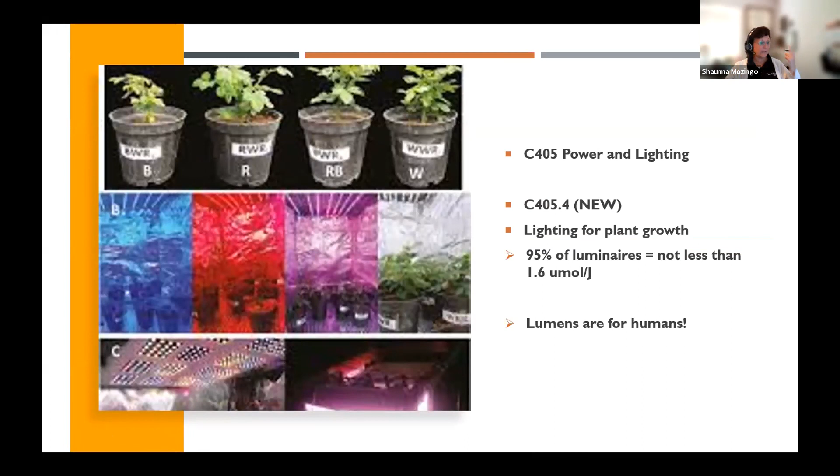Hey, you're going to need daylighting. Show me where you need daylighting. And daylighting expanded in the 2021. It's even bigger areas. So make them turn it into you so that you get it right. Same with parking garages, new requirements there. So make sure that they're turning in those areas. Plant growth, this is just making sure that you're looking that it used to be not required and it is now. Get those right for the lighting, for the envelope, and for the mechanical.

And then how are we going to do this? Making sure that somewhere on the plans, you have the ability to go through there, maybe sit with your electrical inspector or plan reviewer till you can come up with how does this need to look on the plans? What do I need to be seeing for controlled outlets? Certain occupancies, a lot of them require now controlled outlets. 50% of the outlets have to be able to shut off when the business is not open. What does that look like? Each outlet might have one or the other controlled, or every other outlet. Get with your inspector or your planner, your electrical, and figure out what that needs to look like.

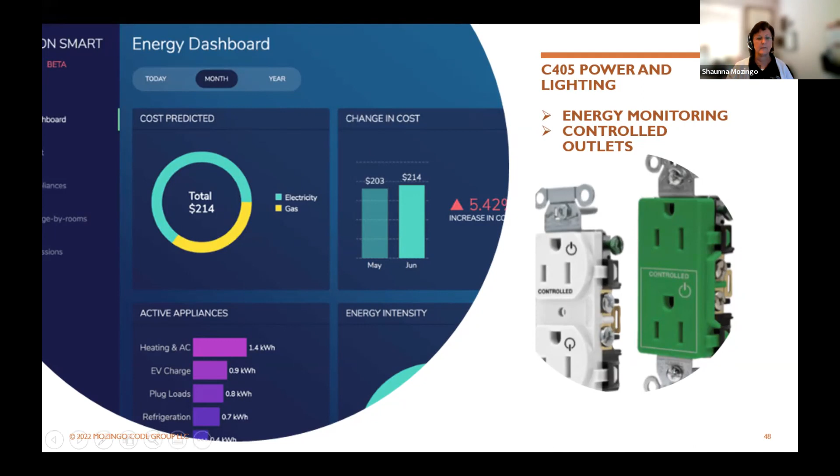And same with energy monitoring. What does that look like on the plan? Can they just say we're going to monitor? Do they need to put a system? There's a lot of requirements for that energy monitoring. It has to have a system. It has to actually report to something and they have to turn in reports. We need to kick those plans back and say, hey, identify how you're going to deal with this. Don't just put a stamp on there. Kick it back so that they are so aware of it, it becomes natural for them to do it.

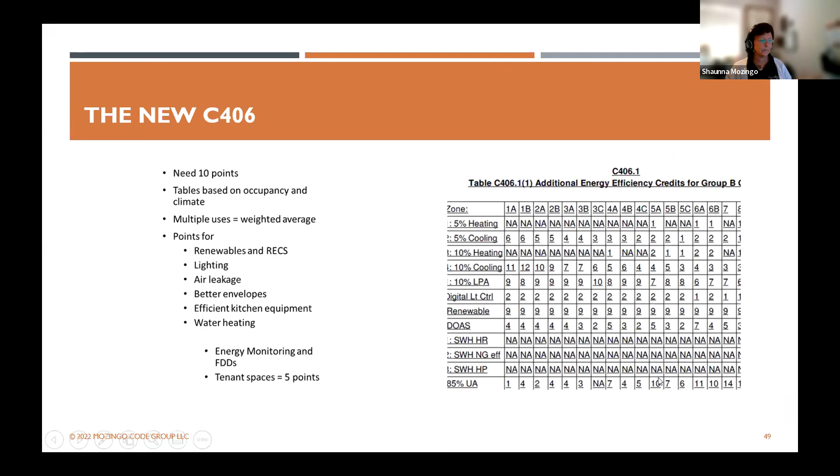And lastly, for additional efficiency package options, you have all of these options depending on the kind of building you are, the climate zone you are, the different points. They have to get 10 points. So what am I doing in C406 now? What is the occupancy of the building? Is it a new tenant space?

Because that has a different requirement. What is the climate zone? I need to pay attention to that. Is there anything in any of those that they are required to do in a different chapter? I don't want to let them get points for that. They've got to get 10 points without that. What options did they choose? Did they turn in the right documentation for those options?

If they said, we're going to do a DOAS system, okay, you don't just get the points for it. You actually have to show me your dedicated outdoor air system on the plans. Show me, I want to see it. So whatever they chose has to be on the plans. They're not just getting credit for it to pass. Did they get their 10 points, and how did they put that on the plan? So really pay attention to that.

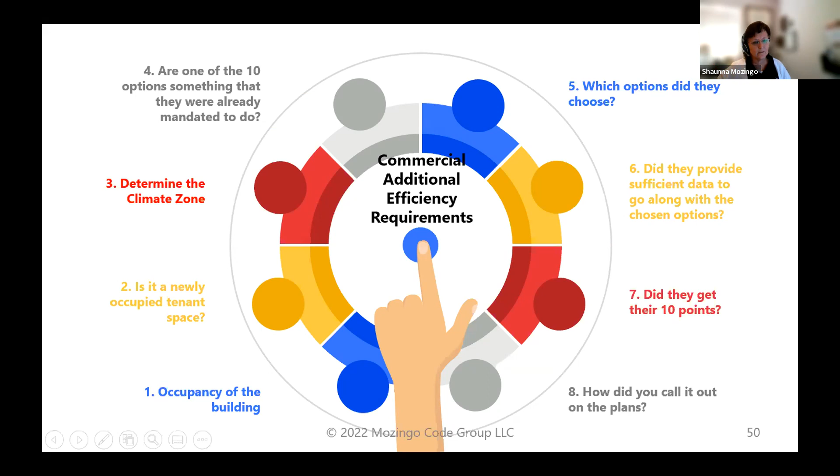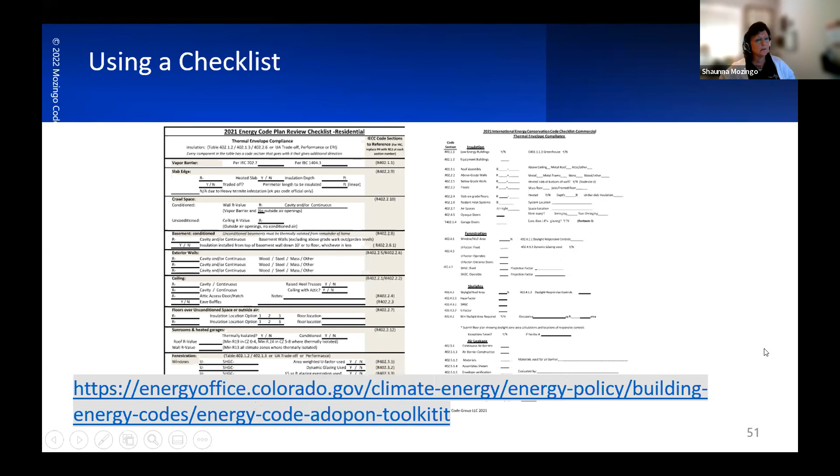And then if you use a checklist, great. I just had a designer call me the other day: can you send me the checklist you use? Well, you can go to the toolkit that Erica was talking about and get a checklist. There's a bunch of them on there. Here's the checklist I use.

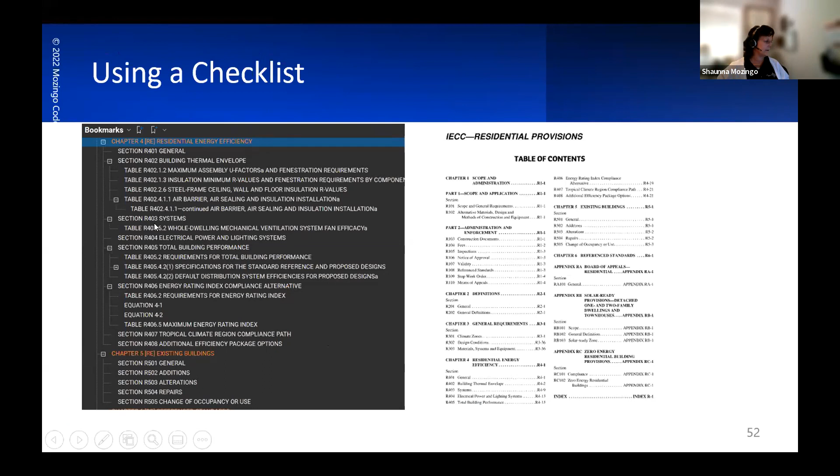When I'm doing a residential or commercial, any code, I open every single code book. I go to the table of contents. Okay, this is going to apply. This isn't going to apply. This is going to apply. I better open this because I can't remember what it said. This is the best checklist you're going to find, the table of contents. What applies, what doesn't. Oh, they didn't go performance, I don't even have to look in R405, right? I just use the table of contents as my checklist. I threw that on there because I had somebody ask me.

So walk through the code, make sure the documents match and they're not giving themselves credit for something they have no intention of doing. Get everything together. The ResCheck goes in the field with the plans. The performance report goes in the field with the plans. Anything they turn in goes in the field with the plans so that when I'm the inspector on the job site, I have everything the plan reviewer had. So I need all of it to go in the field, stamp it, reviewed for code compliance, and send it out the door.

Sorry, I know that's probably not 100% what you were looking for. You want a full plan review, but there's no way to do it in that amount of time. Just going over high level, here is what I find the most. So, Erica. Thanks, Shauna. I know that's a lot. Push through the remainder of the presentation too. So we do have a few questions for you.

First one is, please confirm if Denver now follows the IECC 2021. When did it start? They are not on the IECC 2021 yet. We are going into code hearings at the end of this month to make amendments to the 2021 codes in Denver. And the follow-up question is, does this mean that we are not allowed to use any incandescent lighting since they all have to be high efficacy? The 2018 was 90%. 2021 is 100%. Could you trade it off? No. Right, because it's part of that mandatory table in the trade-off path.